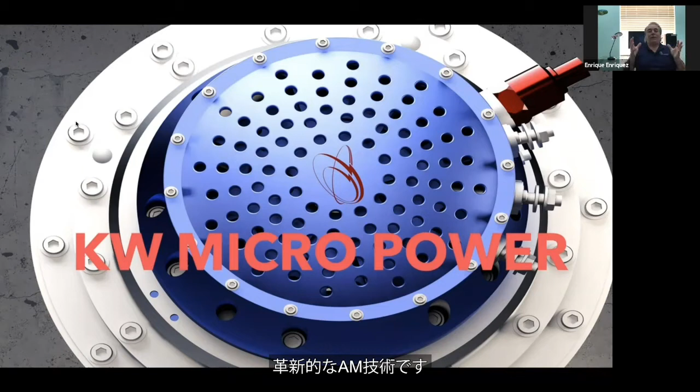Hi everyone. We at KW Micro Power are aiming to build the smallest, most powerful, and lightest generators for aviation and ground power. Obviously, the way we intend to do this includes a lot of 3D printing, and that is pretty much our goal. We intend on doing this by combining the most powerful software package available with the best 3D printing capabilities that we have found. This is my team that is helping me to make our generators as lightest, smallest, and most powerful as they can be.

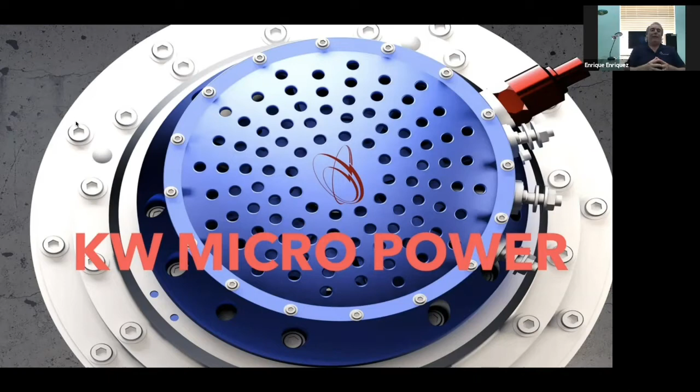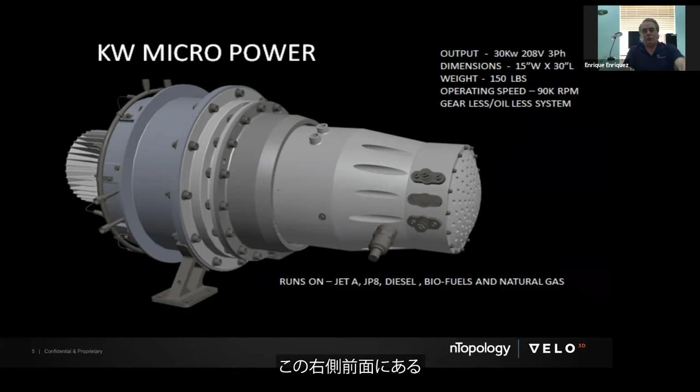This is our 30 kilowatt generator that we're introducing soon, hopefully this year, by mid-year. In it, there is quite a number of components that have been 3D printed, and we'll get into that in a little bit. Our generator produces 30 kilowatts. Its dimensions are about 15 inches in diameter by 30 inches long. It spins at 90,000 RPMs. It runs on diesel, Jet A, JP8, natural gas, and biofuels. The part we're going to be covering in this case study is the one at the front, and that is the generator case.

3 years ago, I had a big problem. I had a difficult part that nobody could make, and this was one of the key parts in my engine. So with that problem, I went to IMTS looking for a solution, looking for somebody that would save me, because if not, I was just going to have to redesign the whole thing. I happened to run into an old colleague of mine, an aviation consultant, very intelligent fellow that knows a lot about manufacturing high-end components. I told him my problem, and he said, Enrique, if you're going to solve that problem, you got to go see Velo. They are the most advanced, most sophisticated 3D printing systems that I know of.

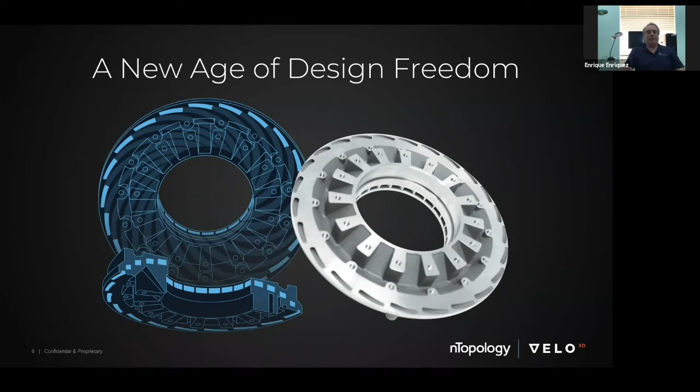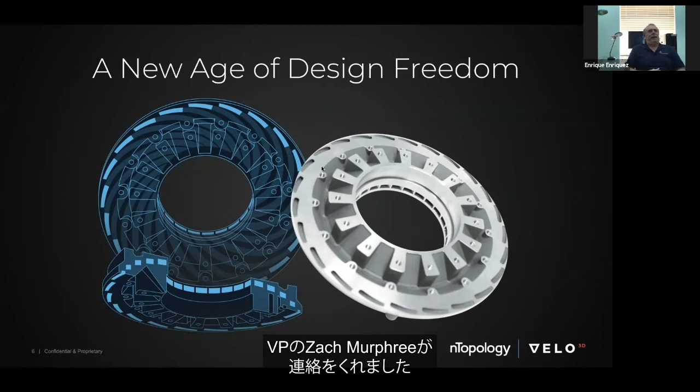I had not heard of Velo up until that point. So soon after, I headed on to Velo, and there I met Benny Buller, the company founder. I told Benny about my problem, and he said, let me get your information, we'll get someone to get in touch with you. Soon after, Zach Murphree, I think at the time he was the VP of partnerships for Velo, contacted me. I told him about my problem, and I shared my information. He said, let me take a look at it.

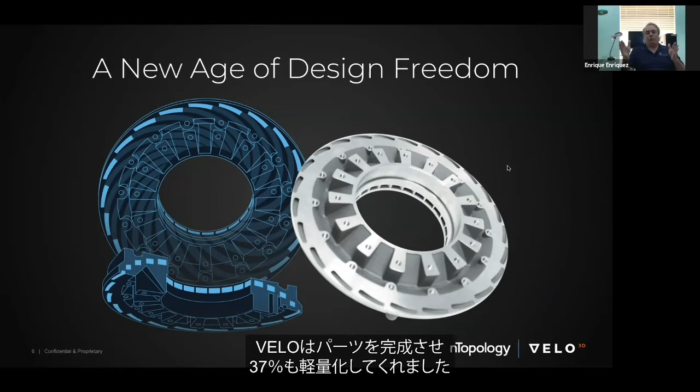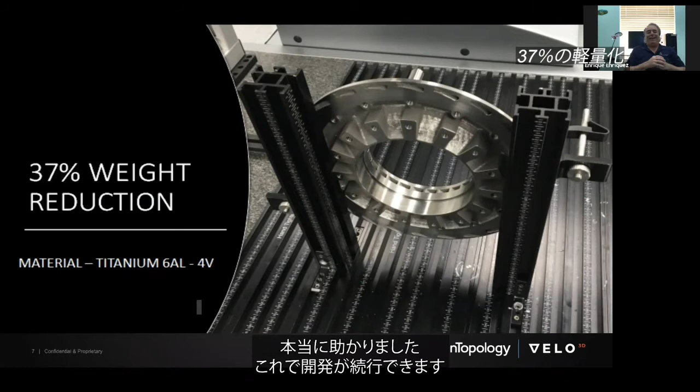I'll contact you soon. The short of it is that about a month later, not only had they come up with a solution for the part, they had knocked off 37% of the weight. And here you see the part. So, I mean, that just saved me. And we continue on our journey. At that point, I had become a big fan of Velo.

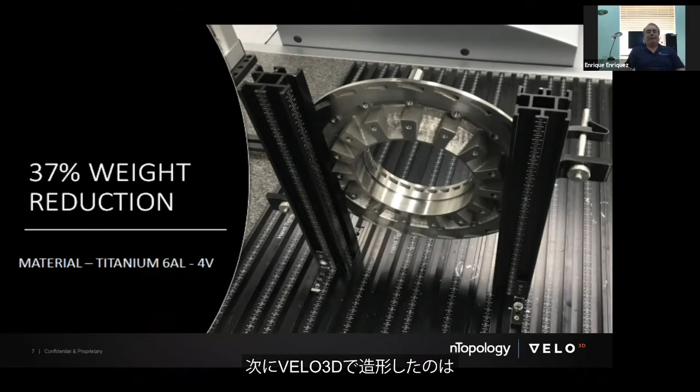Now that we have identified the manufacturer for us, we also need and want to work with the best software package that can make me maximize each component. For the next trick that we did with Velo, what you see here is an igniter system for our engine that previously was made out of 3 very tight tolerance Hastelloy components. We were able to combine the 3 parts into one, and at the same time reduce the cost and reduce the weight of the component. That was project number 2 that we did with 3D printing.

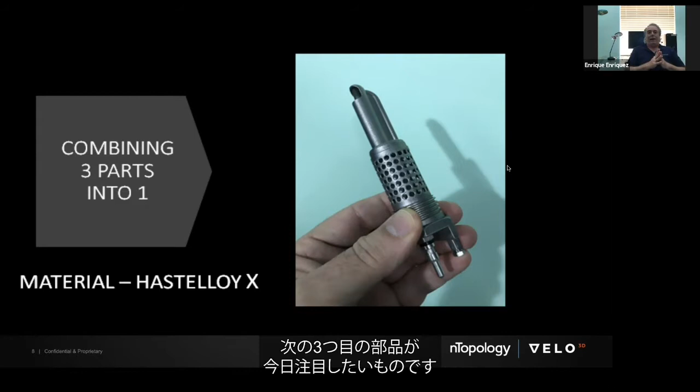Project number 3 is the one you're going to hear about today, and this is the case for our generator. From our billet configuration, when we started thinking, well, now we want to knock off all the weight that we can out of this part, we started thinking, what else can we do? What else is there, anything else can we gain? Are we leaving anything on the table?

One of the great things that we could do was to cool it. If we could find a way of running fuel through that part, we would have a couple of gains. Not only will we bring the temperature of the case down, which in turn helps the generator, but we will put all that energy into the fuel, which downstream will help my combustion and make it more efficient. So that is the premise of what we intended to do: knock off weight, run fuel through it, cool the case, and put all that energy into the fuel. And in order to do that, Zach told me, look, we're going to need to work with nTopology.

And I said, who's nTopology? He says, well, nTopology is the most powerful software package that we know of out there that can maximize your design. So he put me in touch with Ryan O'Hara,

who has been just brilliant in his work. Without much further ado, I would like for Ryan and Gene to take over and tell you what it is that they did with this part.

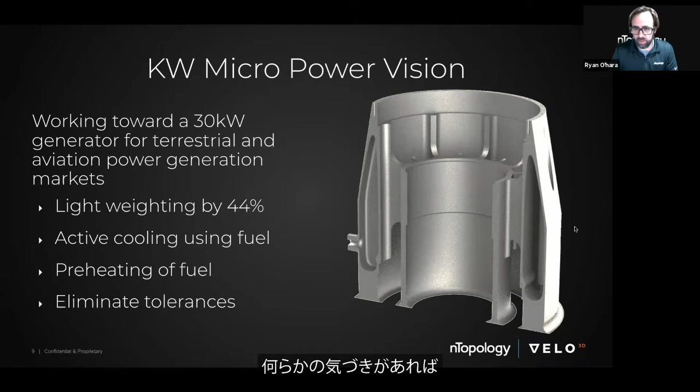So just real quick background on, hey, what's nTopology? nTopology was founded in 2015, and we released our first product in 2017. That product was focused on periodic structures.

And then in 2019, we released our latest product called nTopology Platform. The idea is that's a computational modeling software for design, simulation, and advanced manufacturing. We'll touch on each one of those areas today.

The key differentiator for our technology is that in most traditional CAD or CAE tools, you're using boundary representation data, like SolidWorks, Dassault, or Siemens. The idea is that you have a patchwork or a quilt of surfaces needed to represent geometry.

Our fundamental difference in technology is we're representing geometry as implicit math equations. Instead of storing hundreds or thousands or even millions of surfaces to represent geometry, we just have one equation, and we discretize that equation when we need to, whether for visualization, simulation, or manufacturing.

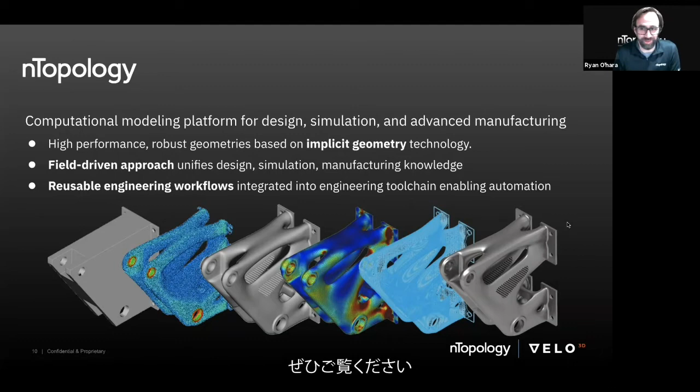Spoiler alert, Enrique came to us with a problem. He had a generator housing, basically a thick piece of material designed for traditional manufacturing—probably a combination of multi-axis machining with some wire EDM, taking a big chunk of metal and then removing material to do that.

Fortunately, when Enrique came to us, oftentimes we encounter designs where some sort of engineer, usually a really smart engineer, has taken their design and optimized it for their manufacturing process. Then they often come to us saying, hey, I want to take this to the next level. And we often say to them, hey, maybe you actually did a really good job designing for your process—maybe there's not as much help we can provide.

In this case, Enrique came to us a little bit earlier on in the design process, and we still had some flexibility and ways to improve this part. And it was real simple.

Enrique had a heat problem. I have a big piece of metal, I'm only cooling it with air, but I have plenty of room to add some cooling. I said, hey, I got a solution for you, Enrique, and it's super simple. We're gonna variably shell this part and fill it with a big cooling volume.

In this early discussion, Enrique expressed that he has fuel available. Fuel is often used in aircraft instead of just being a parasitic device or source of energy—often it's pumped throughout the aircraft to cool things down. I asked if we could do the same thing in this scenario, and he said, sure.

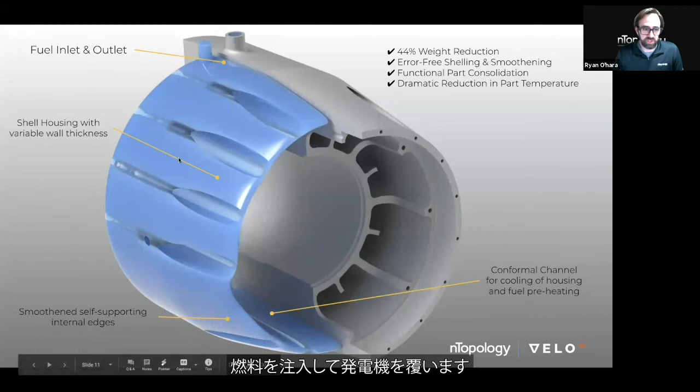So this is kind of the concept we came up with. We basically have a generator housing, and inside that, we're just going to fill this with a big volume, and we're going to pump that fuel around. But in addition to adding this cooling volume, we're also reducing weight—we took about 40% of weight away and replaced that with this cooling fluid.

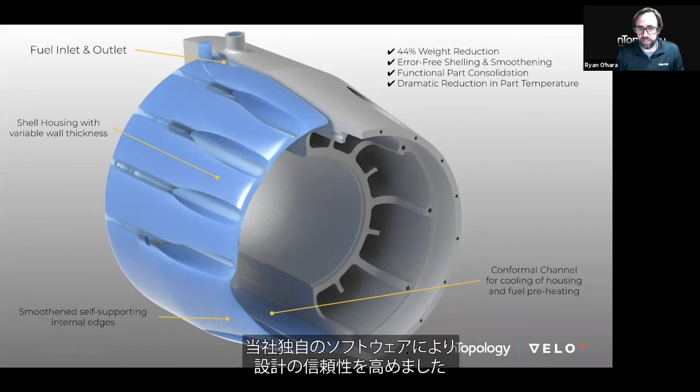And then we'll get into how we did that and some of the things we did in our software to gain confidence in the design. This is kind of a home run for our software. In traditional CAD tools, oftentimes when you need to shell a part, it can be quite difficult depending on the complexity.

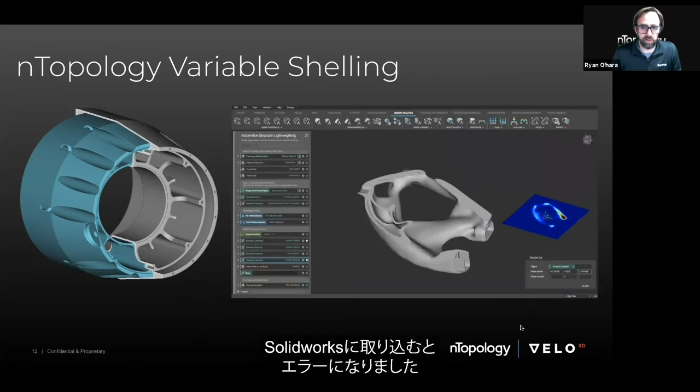When Enrique gave us this original design, I actually tried in SolidWorks to shell the part, and I instantly got an error saying the quilt work of boundary surfaces wasn't going to allow me to perform that operation. However, in our software, it's easy peasy. It's about a 1 to 2 minute setup and operation.

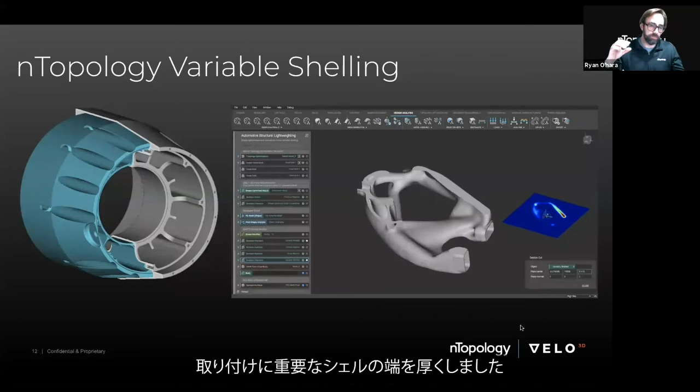The idea here is that we could take a field, and I'm showing an example where we took a topology optimized part that is normally solid. We shelled it, but in this scenario we used a stress field to variably shell this part. For Enrique's design, the shell is thicker at the top and bottom because those are the critical interfaces for mounting. We preserved the geometry and kept it relatively thin in the middle, effectively creating a monocoque structure.

So with that said, kind of get to the goodies. The idea here is that we added almost 2 liters of fluid for cooling volume. In this case, it was going to be jet fuel.

What we did is we took the geometry, the shelling operation that we did, and working with one of my colleagues, we ran an ANSYS Fluent simulation. We basically were able to calculate the fuel heat transfer coefficient so that I can do a simpler model in the design phase quite quickly, all inside of our software.

Fundamentally, what we did is we took the external temperature from about 190 C or 380 degrees Fahrenheit, so basically really hot, like creating an oven there. And then we were actually able with the fuel to cool the exterior of the case down to about standard temperature and pressure, which is what the fuel is at in its storage tank.

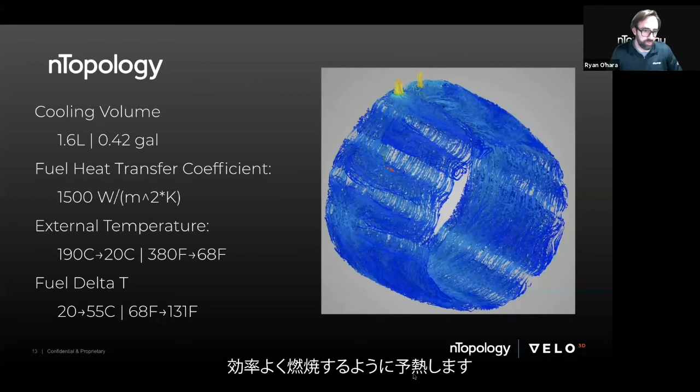And fundamentally, we're also heating the fuel. I think Enrique can talk to this in more detail later, but the idea is that by transferring and conserving that energy, we're basically preheating the fuel so it's going to combust more efficiently. So kind of a win all around.

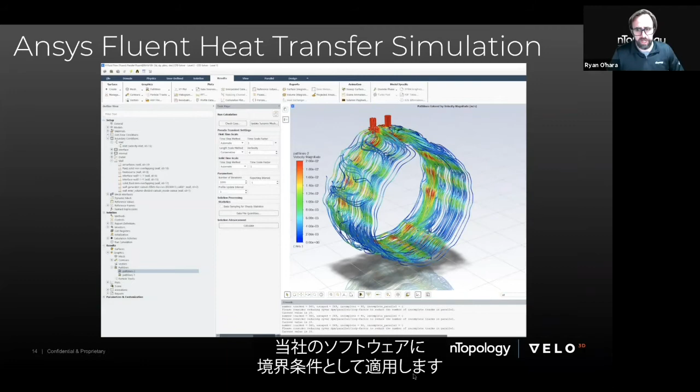Real simply, we took the internal geometry, and this is the ANSYS Fluent heat transfer simulation we did. We're able to calculate this heat transfer at the walls, and I was able to apply that as a boundary condition in our software. We took the part that has been shelled, generated an FEA mesh inside of nTop platform, which is a surface mesh, and ultimately this FEA mesh.

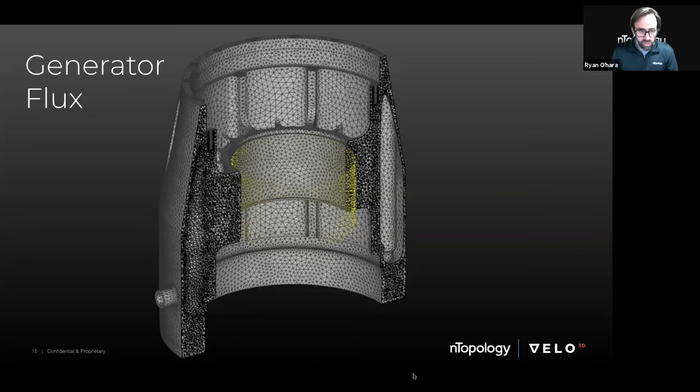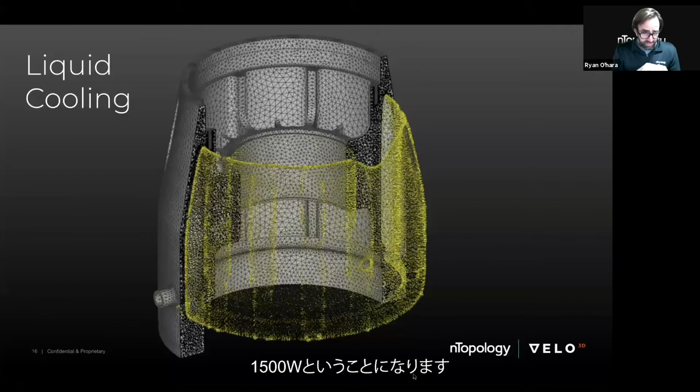In addition to modeling the generator, in this case a 30 kilowatt generator, Enrique has said in the past he's able to achieve about 95% efficiency. We assumed about 5% of that was going to be waste heat, so about 1,500 watts we're applying as a source of heat inside of this, based on that surface area.

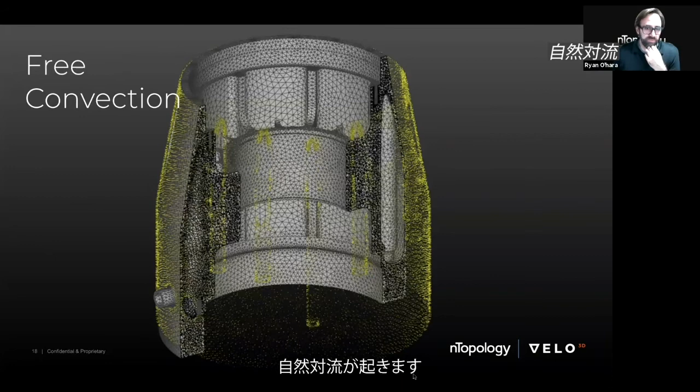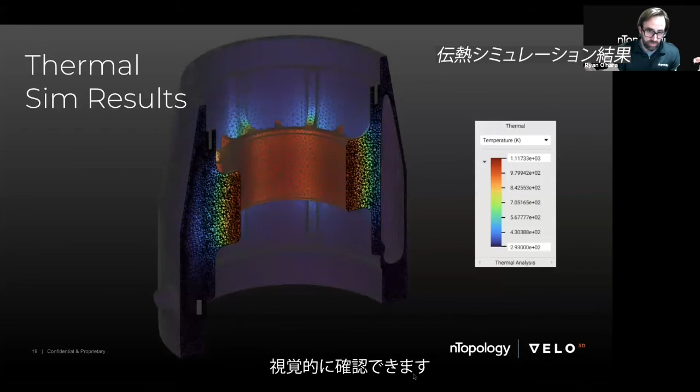We're actually modeling the heat transfer here in our thermal solver, and we're also modeling forced convection. Enrique is using this generator to pass air to feed the turbine itself, providing additional cooling and ultimately some free convection. When we set this up in our FEA problem, we end up with a thermal simulation, and we're able to visualize the heat load path in this scenario.

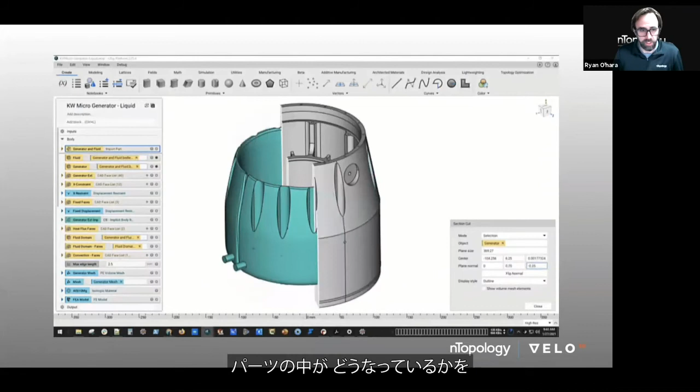So I think with that said, again, just want to reiterate, this is huge, not only are we in aerospace. If we basically, within a series of a few operations, are dropping our mass by 40%, and I'm providing an exterior cooling or temperature drop down to near static temperature and pressure.

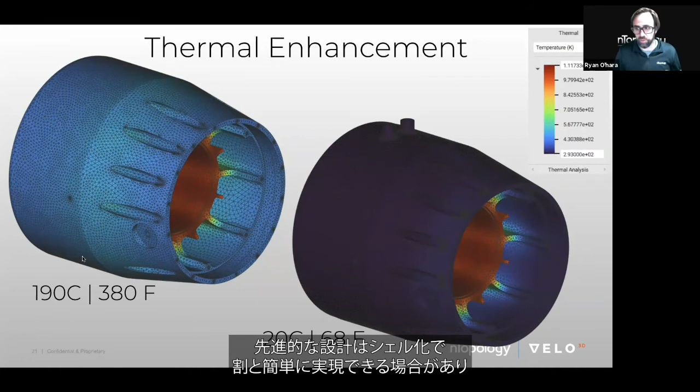As in preparation for this, I think all of us, Gene and Enrique, we all talked about this. It's like, this is a real simple win - I made your part stupid light and I made it really cool, wash my hands, done, high five everybody and win, right? So it wasn't in this sense a terrible engineering problem, but it's really the culmination of bringing a need, some advanced design, being able to do a relatively simple operation, you would think, called shelling, and then actually applying that here to this part, and then fundamentally manufacturing it. And with that said, I'm going to turn things over to Gene.

Thanks, Ryan. Hi everybody, I'm Gene Miller, and here to talk about the fun part of this whole project is actually manufacturing it without the need for any type of compromise. The real big win here was to take all that work that Enrique did and all that work that Ryan did and say, yeah, sure, let's print it. We don't have to go back to the drawing board, we don't have to compromise, we don't have to make any changes.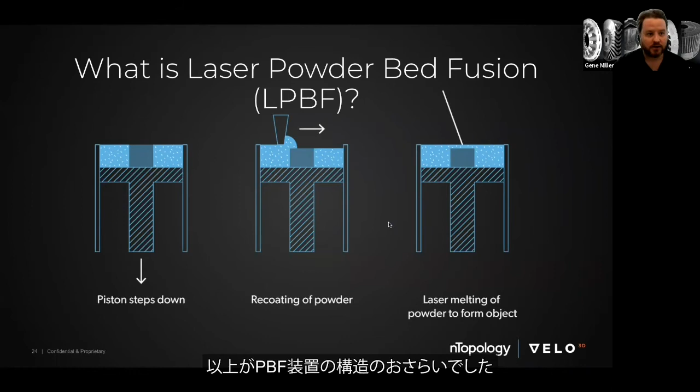On a conventional metal AM system, the recoater - I like to call it a dump and smear method - it kind of just plows a bit of powder over the top of the part and leaves a thin thickness of powder to be melted selectively by the laser. Every layer happens iteratively, and eventually it builds up to complete your printed part at the end of the day, and then all the unfused powder is removed and recycled. That is essentially, on a high level, how a typical laser powder bed fusion system works.

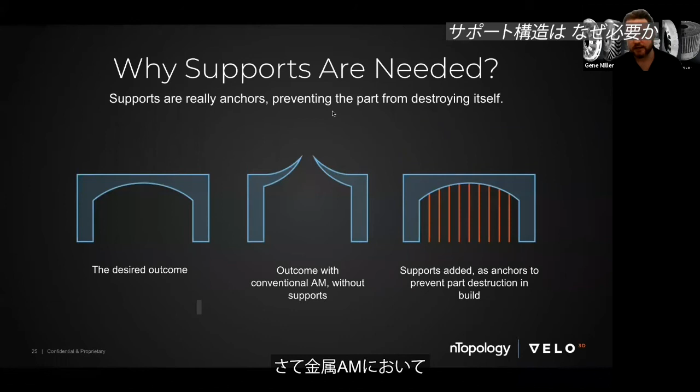So in a conventional metal AM system, these challenging features that we have to overcome are supported. Supports are really, they're not there to prevent the part from collapsing or anything. They're actually there to keep things anchored down and constrained so that the internal stresses that are developed during printing don't cause deleterious warping and movement of the parts.

If you look at the desired outcome on the left here, this is essentially what we would want to print, but without any support material, these overhangs tend to warp upward and can tear themselves apart and cause recoating to be impossible. So the conventional solution is to add supports to these low overhangs, and that's what we're showing here in red - support material that's added to the part.

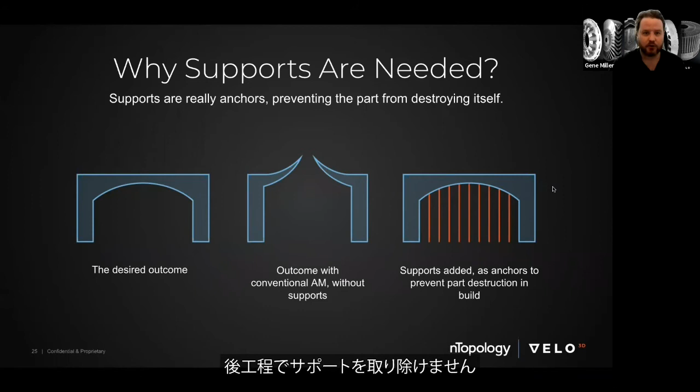That's fine if you can access that material and remove it after you're done printing. In this case, we have some really isolated volumes which are inaccessible after printing, and you just can't get in there to remove any of the support. So we can't put it there. But the good news is we don't have to.

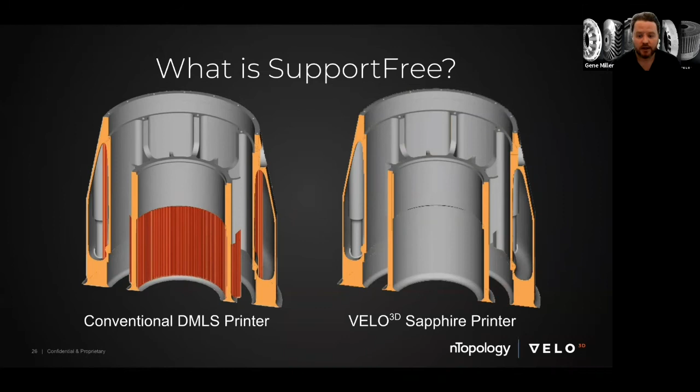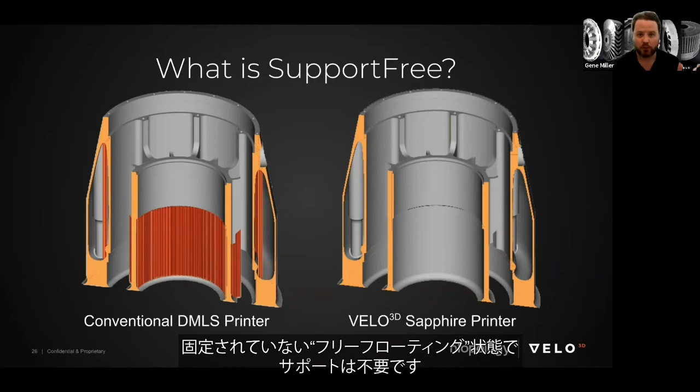The Velo3D Sapphire printer has no need to put support on these internal volumes. So at the end of the build, all you have to do is just remove the powder from these channels, and they're open and free flowing, with no need to add any support material.

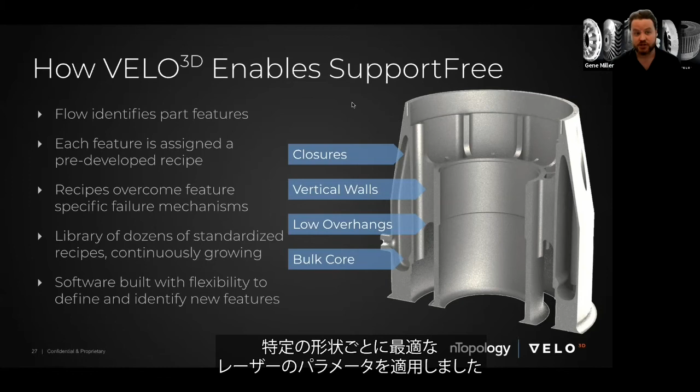So how do we do this? It's kind of biting off smaller pieces and applying specific laser parameters to specific geometries in order to get a desired outcome without the need of adding support. We have our preprint software package that Velo3D designed - it's a preprint kind of 3D space where the user can import a CAD part, orient and add support, and then click prepare for build. Now Flow automatically recognizes all the geometries in this part and applies specific laser parameters to ensure successful printing without the need for added support material.

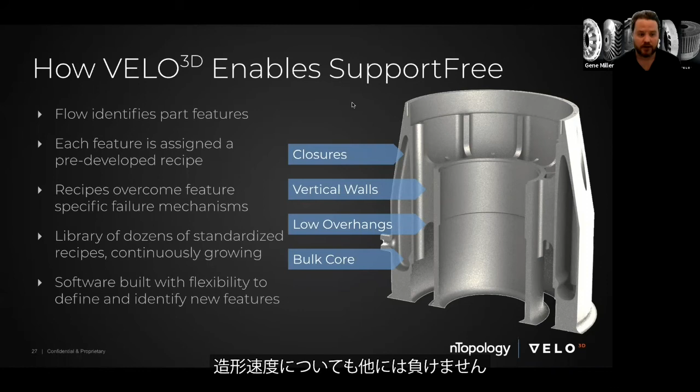In this case, for this part, we have certain geometries like closures. There are tall vertical walls, some low overhanging features that go below 45 degrees or even near 0 degrees, and then there's also some bulk core where you really want a specific laser parameter to put down as much material as quickly as possible to really enhance your print time. This discretization of laser parameters really helps us achieve unprintable geometries in other senses and really still be competitive as far as a throughput sense.

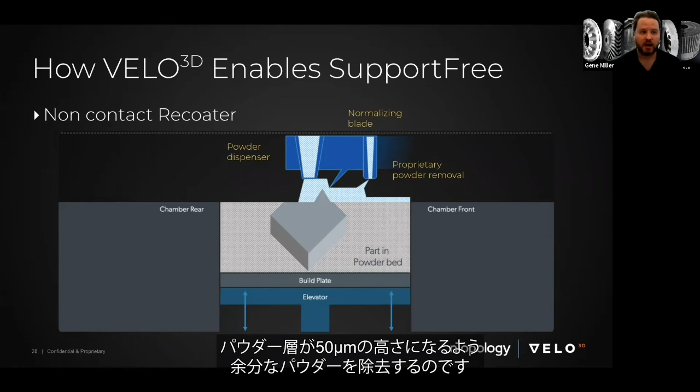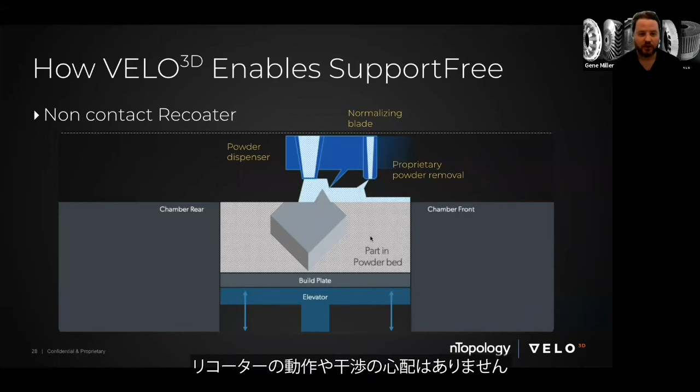That's our proprietary powder removal tool that comes in behind the normalizing blade and removes all but 50 microns of powder. So the net is the same—we still have a 50 micron thick powder bed each layer, but we never actually come in contact with the part. We don't have to worry about movement or interference with the recoater.

So the Velo3D platform, we call it a full stack solution. There are 3 tiers of our product. First is Flow, where the engineer takes their CAD or design intent, brings it into a 3D space. They can orient, add support material if necessary, process overrides, and then prepare the print file. That print file is taken over to the Sapphire printer, and that's where the real printing happens—that's where we recoat, selectively melt, and print the part.

Now, all throughout that printing process, there are literally thousands of sensors gathering data on this machine, and we needed a way to compile it in a concise, graphical, user-friendly interface, and that's where Assure comes in. Assure is our quality validation software, designed for real-time monitoring of builds as they're printed on the Sapphire machine, and after the build, we produce a concise, clear build report to validate the quality of the part.

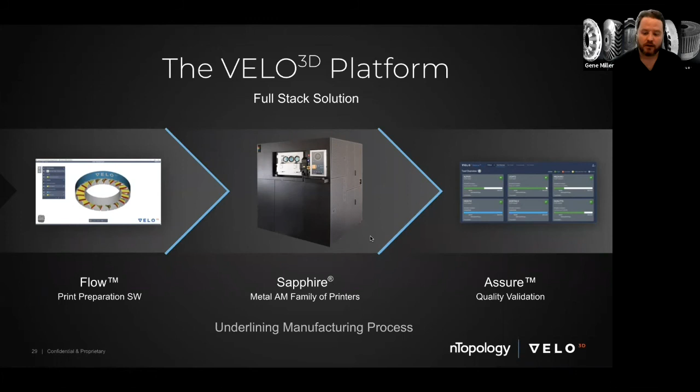So going through this build in particular, it starts off pretty typical. There's some bulk material here, and where this little clip ends is at the beginning of the cavity as designed by nTopology. There's nothing really challenging about this yet, but this is where this part starts to get interesting—this is where we've got these open cavities as designed by nTopology.

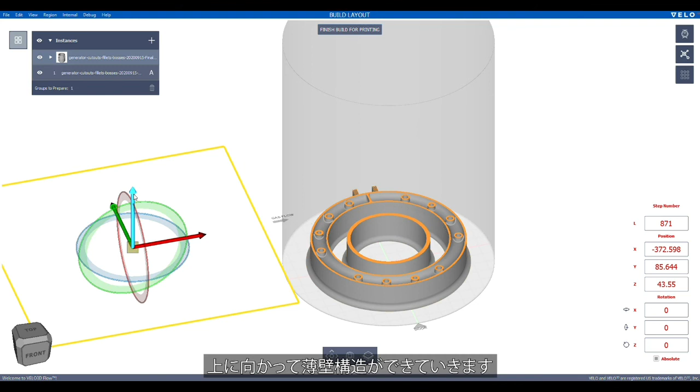Moving upward from there, the walls are pretty thin. They start to get pretty tall, especially these internal bosses and tubes, which can be subject to recoater interference. As they get very tall, they get flimsy, and any lateral force could move that thin structure around. On a conventional metal AM printer, that might be problematic—but it's just something we don't have to worry about because of that non-contact recoater.

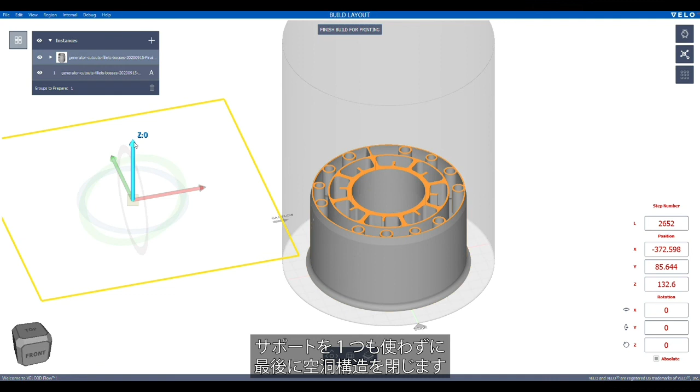Then lastly, these internal cavities close out without any added support material. Again, they get a specific laser parameter so that we don't have any real degradation of surface roughness at that closeout, as well as no need for added support material that in this case would be impossible to remove.

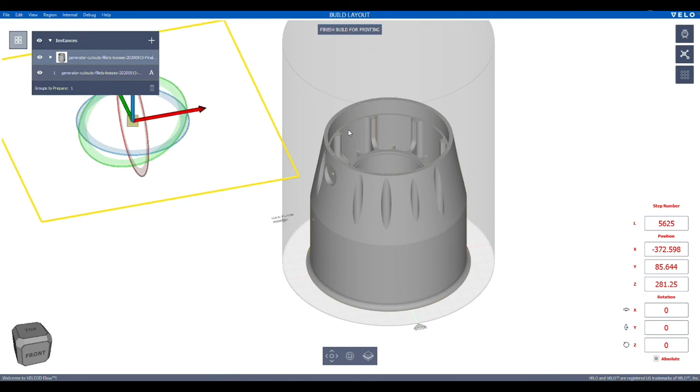And here's the printed part. This is right out of the printer, ready for final machining. This part was about 9 inches round by 9 inches tall. It's printed in aluminum F357. The overall print took just under 3 days, about close to 5,000 layers.

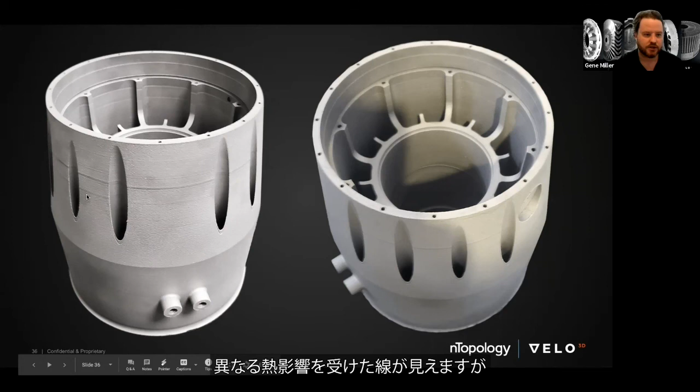And this line that you see here is an artifact of the internal closeouts and internal passages, causing a difference in thermal history, but it's all cosmetic. We were really pleased with how this came out. All the internal passages are free flowing and able to do exactly as intended by Enrique and Ryan.

And now I'll hand it back to Enrique to summarize what we talked about here today.

Basically, the message here is design without limitations. What I call it is a great opportunity for today's engineers to really go back and look at everything and see—can I do it differently? Not just knock weight off of it, but is there anything else that I can gain? Can I put a probe here? Can I put a sensor there? What else can I gain?

And when you start looking at every part, then you see gains all over the place. Like, for example, we're going back to the drawing board—there's more work to be done with nTopology and Velo for me, as you can imagine. So I'm a glutton, I want to completely devour this opportunity. For the rest of you engineers out there, it's what I call a renaissance of engineering. You just go out there and look at a part differently—now you're not limited by conventional machining methods. And that's my message.